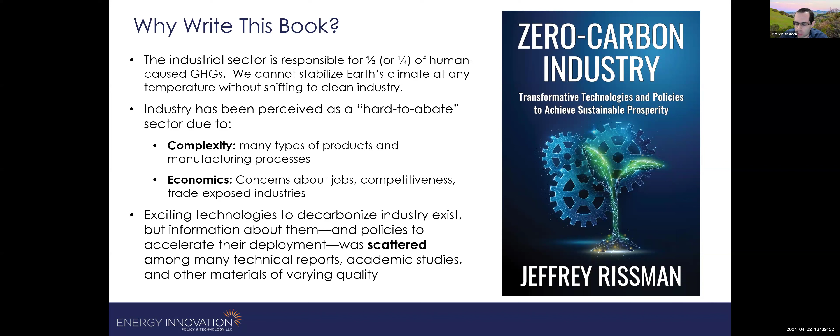And what to do about trade exposed industries. So there are so many exciting technologies now to decarbonize industry, but the information about them has been scattered across many different publications, technical research reports, academic studies, and often the technology information is divorced from the policy information. So there was really a need to bring it all together into a comprehensive blueprint or roadmap for how we get from where we are to how things will be made in the future in a clean, sustainable way.

So quickly, for an overview, when we're talking about industry, what we're talking about are the firms that make the materials and products we rely on every day, like steel and chemicals, which includes plastics and fertilizers, cement, other metals, refining, and so on. And you'll notice that globally, about 60% of the world's industrial emissions are from these top three industries: iron and steel, chemicals, and non-metallic minerals.

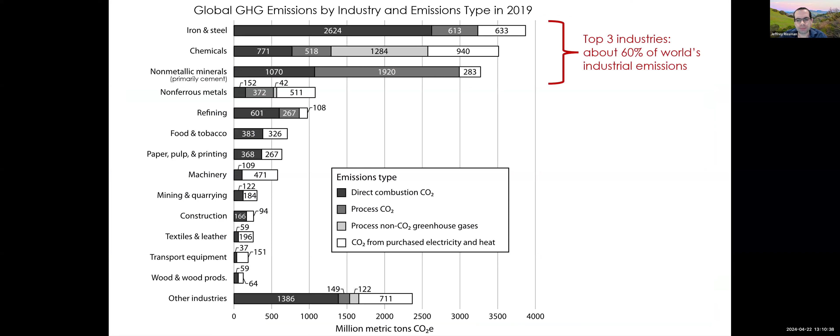As far as distribution goes, China stands out as being responsible for about 45% of global industrial emissions, partly because of their large scale of manufacturing and partly because they use a lot of coal, which is a particularly emissions-intense fuel. India and the United States, and then the European Union, if you were to group together those countries, would round out the top four.

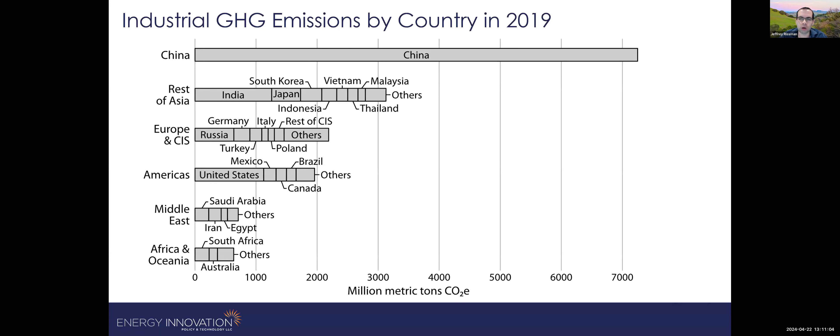So let me touch briefly on some of the exciting new technologies for primary steel production without greenhouse gas emissions or other pollutants. So today, steel making is a multi-step process. You prepare the raw materials, you make iron, and then you turn the iron into steel.

It's dominated by primary steel, which is the majority of all steel making. And most of that, 93% of primary iron, is made in a blast furnace, which is fueled by coal and a carbon-based fuel called coke. There is some steel recycling, responsible for about 22% of demand, but it can't scale up very much because we don't have enough scrap to recycle to meet today's steel demand. So it's important to develop technologies that can decarbonize primary or non-recycled steel making.

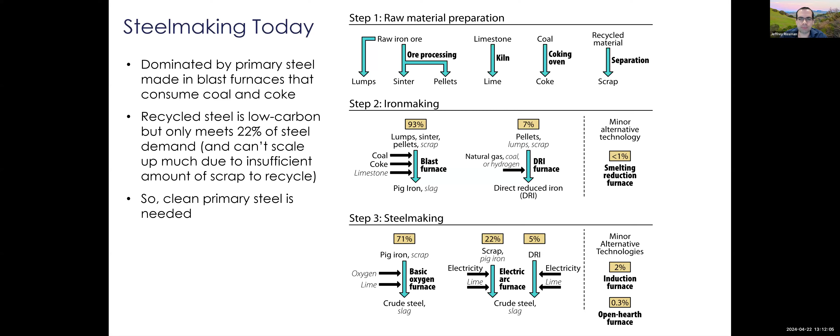One such technology approach is hydrogen direct reduced iron. So instead of using that coal and coke I mentioned in the blast furnace, you can use hydrogen as a chemical reducing agent in a DRI, or direct reduced iron furnace. About 2/3 of the energy this requires is making clean hydrogen in an electrolyzer, which splits water into hydrogen and oxygen. The remaining 1/3 is used mostly in an electric arc furnace that converts that direct reduced iron into steel. It does require high quality ore, but it's possible to upgrade lower quality ore through magnetic or gravitational separation.

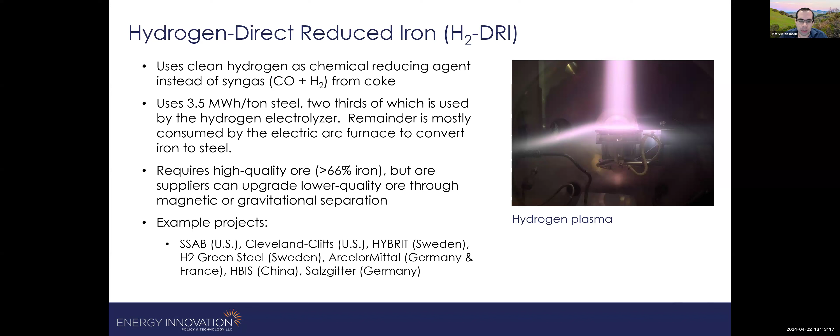So that isn't a hard and fast limit on the direct reduced iron process. And there are some exciting example projects now. In fact, two were part of the recently announced projects with the Office of Clean Energy Demonstrations in the United States, one with SSAB and one with Cleveland Cliffs, as well as a variety of projects elsewhere, like Hybrit and H2 Green Steel in Sweden, ArcelorMittal in Germany and France, and so on.

The other technology I'll touch on here is electrolysis. So the idea is, instead of using a chemical reducing agent like hydrogen or coal and coke to separate iron from iron ore, you instead use electricity to do that.

You can either do this in an aqueous solution where you insert electrodes, run a current between them, and metallic iron particles deposit on the cathode, which you can then collect and melt in an electric arc furnace. Or you can do this at high temperature in an electrochemical cell, where you still run a current through it, but at high temperatures. The impurities form a layer called slag on the top, and molten iron forms on the bottom of the chamber where it can be tapped.

Both of these approaches have some startups: Electra for aqueous electrolysis and Boston Metal for molten oxide, as well as research projects primarily in Europe with Siderwin and Europe's ULCOS, ultra-low CO2 steel making.

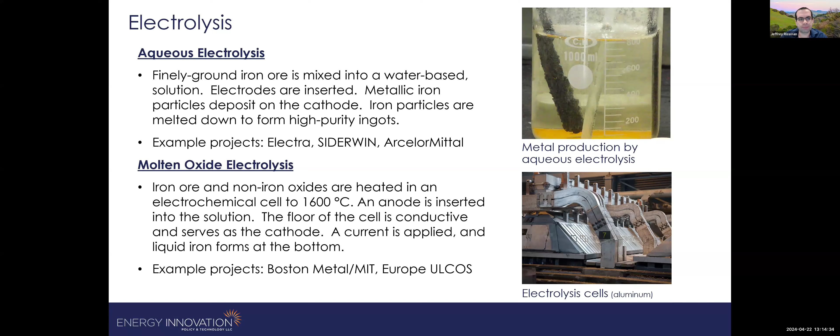Have to keep moving along because we only have a few minutes left, and I will touch on some of the electrification of industrial processes.

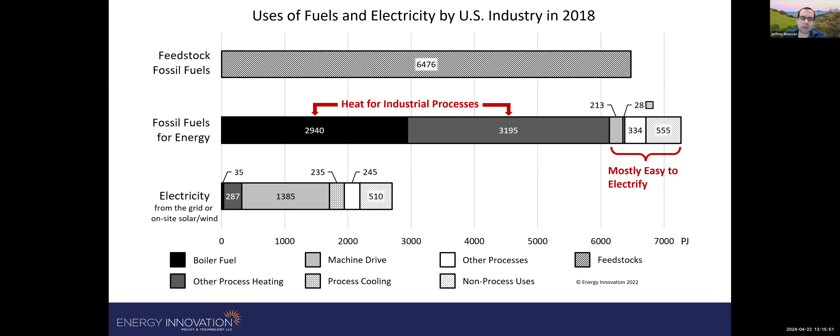The small bit on the right are other things like machine drive, which is moving things, let's say with a diesel engine, and is usually easy to electrify with an electric motor. So when we're talking about decarbonizing industrial fossil fuel combustion, we're mostly talking about decarbonizing industrial heating.

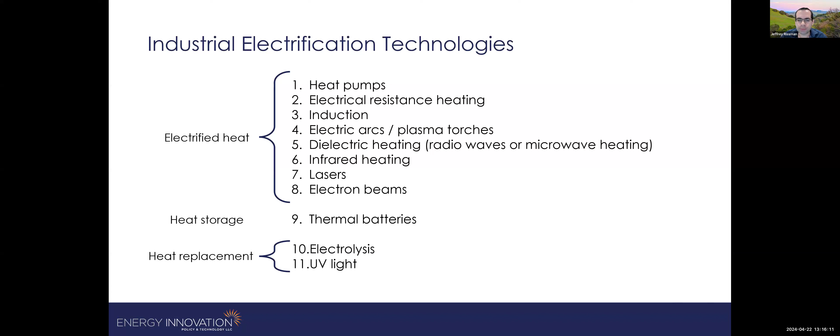And there are a variety of technologies that can provide heat for industry directly from electricity. I won't read them all off, but I've listed them here. I'm going to touch on a couple exciting ones, just to go a little in-depth on heat pumps and thermal batteries. So what are heat pumps?

They're a way of moving heat from one place to another. They use a refrigerant fluid in a closed cycle, similar to your refrigerator or air conditioner at home, to move heat from a heat source area to a heat sink area. They can be very efficient, up to 200 to 500%, meaning the amount of useful heat they deliver to the heat sink is that many times the amount of electricity they consume. They can do that because they're not converting the electricity to heat - they're just moving heat from one place to another.

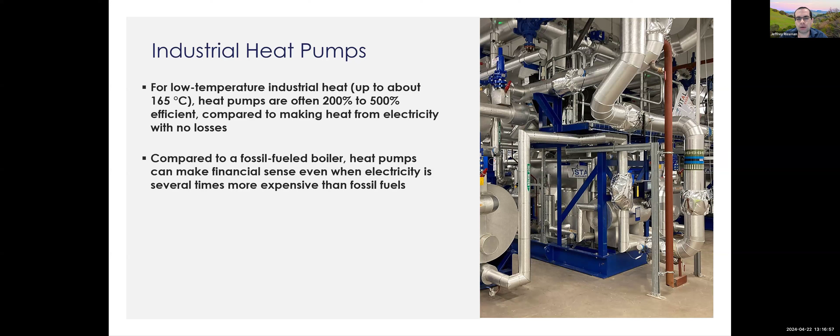So one common application would be to boil water, which is enough for a lot of industrial processes like cooking foods and so on. If your heat source is 30 or so Celsius, then your temperature increase would be 70. That's more than 2.5 coefficient of performance, more than 250% efficient compared to a perfectly efficient electric resistance heater. So you can see that heat pumps are the best, most efficient at relatively smaller temperature increases, but they're still quite efficient up to higher levels shown here.

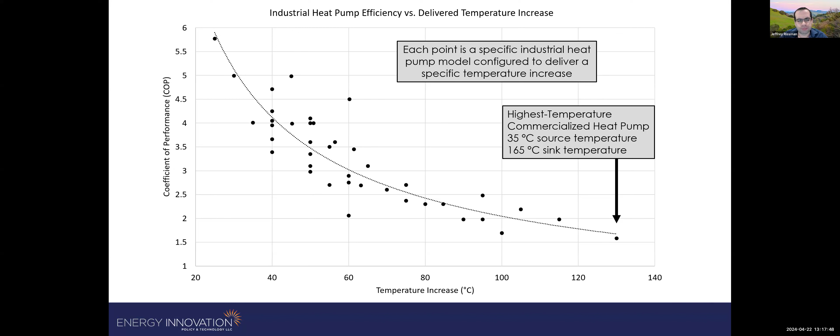The other technology I want to highlight in my limited time is the thermal battery technology. This is a way of storing heat to use later. Essentially, it's a thermal storage medium like graphite blocks or silicon dioxide sand that gets heated by an electrical resistance heater, coils of wire essentially, which take in electricity from the grid or from off-grid projects.

And then when the industrial firm needs the heat, they can either circulate a gas like air through the battery, and it takes the heat out and is used in the facility, or they could open a hole in the case to let out visible and infrared light. And the interesting thing about this is that it lowers the cost of industrial heating.

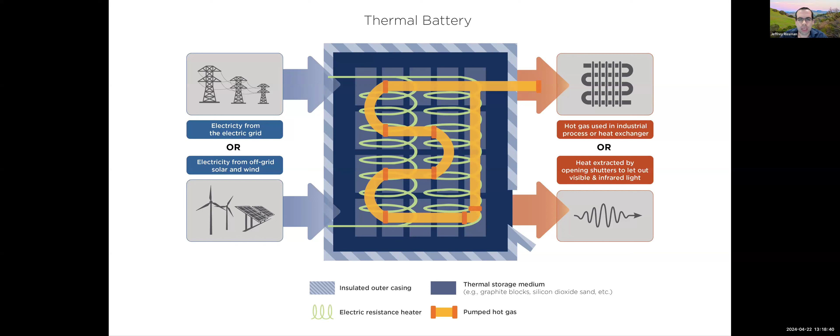And it's enough to make it competitive within the range of natural gas, keeping in mind that natural gas prices are volatile and they move around year to year and place to place. So it's good to think about rough ranges rather than exact numbers.

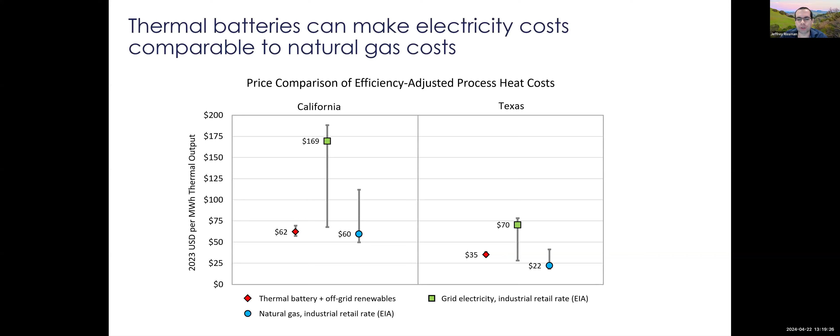Great, Jeff. Thank you so much. And thanks, Silvio, for pulling up the slides. I think Jeff just set the stage really well for the challenge, why this is such a critical area, and some of the key sub-industries we need to focus on given the size and the overall impact, as well as some solutions from a technical perspective, and very much see a similar view of the world from Jeff's perspective there.

I'm just going to share a little bit more about what we're doing at the Department of Energy to try and solve some of these challenges and address the technology gaps and move some of these technologies further into the realm of commercialization and address some of the barriers along the way. So if you go to the next slide, please.

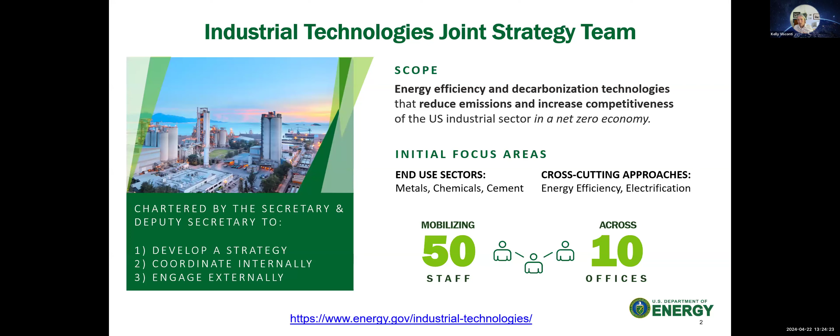So again, this picture is just showing a little bit more of that commercialization timeline pathway, from an idea in that bottom left corner all the way through to something that is a commercially available and adopted technology, and the different offices within the Department of Energy that are really helping drive down different kinds of risks—reducing technical risk, reducing project level risk, and really understanding and helping drive down market risk.

You can see the office that I sit in, the dark blue on the bottom right, Manufacturing Energy Supply Chains. We're really looking at how we help companies overcome market barriers, the cost, the economics, making sure there's demand for these products, to help move the needle and really get these solutions into the factories and into the plants. If you go to the next slide, please.

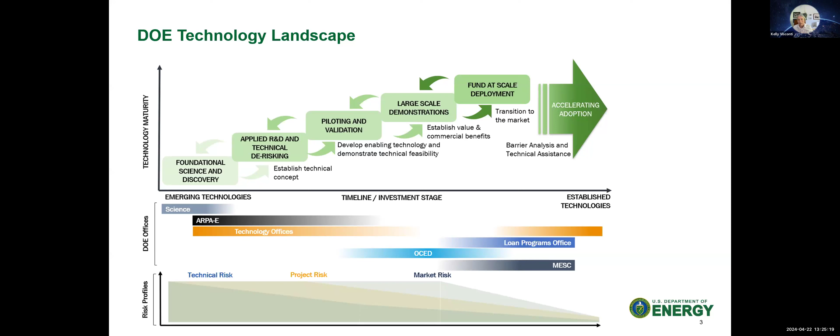And this is just a little bit more of that mapping and landscape. This speaks a little bit to what Jeff was talking about, around the different types of solutions in how you can decarbonize these industrial processes and manufacturing overall. So if you look, there's 5 columns, but if you look at the 4 columns on the right...

This is about switching your source of fuel, your source of feedstock, and energy. So this is that electrification transition that Jeff was talking about, as well as using alternative fuels and alternative feedstocks as one solution set. Energy efficiency is basically doing as much as we can with the electrons and the heat that we're putting into the system—absolutely essential and something we need to continue to drive. There are many opportunities still on the table for energy efficiency today.

The third bucket is more specifically around electrification, not just for providing heat, but there are electrochemical based processes that we can explore and utilize versus traditional thermal processes. So rather than using heat to make a reaction happen, there are different types of electrically based processes, like microwave technologies or radio frequency, that can make the chemicals react and do different things.

And then the last solution we talk about as a category is around carbon capture. So in those situations where the technology isn't mature enough, or we just still fundamentally, because of the process chemistry, have carbon dioxide coming out, how do we capture it and then either utilize it in some long-term material, say cement and concrete, and take advantage of that to make a valuable product out of it, or store it safely and securely underground.

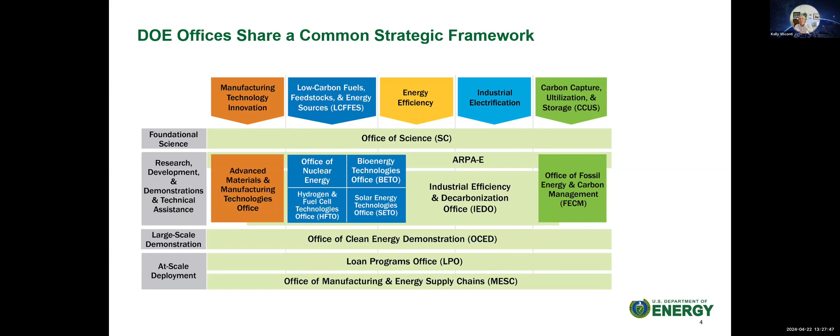Yep, that's great. We've got a lot of different documents and information out there, so just two things I want to highlight. Two years ago, the Industrial Decarbonization Roadmap was published in concert with a lot of engagement with industry, and that really helped set the stage for everything that could possibly happen, setting the framework of those four big pillars we talked about in the last slide. On the right-hand side, that puzzle piece, are the pathways to commercial liftoff.

These were published last September. There are three reports really helping show what technologies and solutions are near cost competitive, or cost competitive today, that can be used by industry in the next 5 to 10 years. And we're working on a joint strategy that's really integrating all of these pieces together.

So I look forward to reading Jeff's book, and I'm sure there'll be some great pointers and tips in there for us as we are taking a peek at how we do this together. And then these feed into things like our multi-year program plans and how we establish the objectives and goals and funding opportunities, make project selections, and then ultimately the funding that we go out with, make sure it's doing what it's supposed to do.

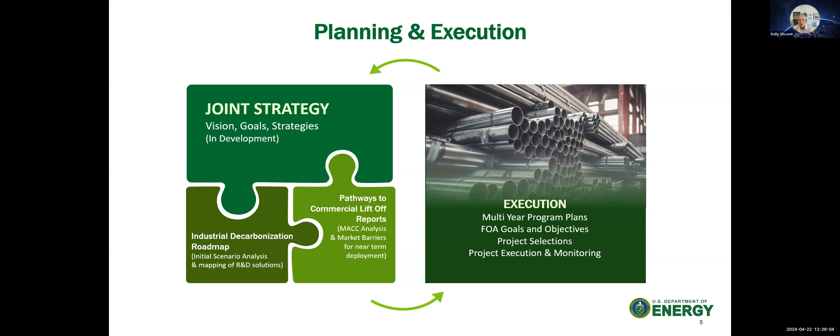So if we go to the next slide, I think I'll wrap up with a short overview of some of the programs that we have. To Sonia's point around a lot of attention on the industrial demonstrations program, there's over $20 billion that's unlocked across 33 different projects, across multiple industries and process types. Super exciting program. There are a few other opportunities still out there we want to make sure folks are aware of. Again, work in the Manufacturing Energy Supply Chain Office, and we're really focused on the 'how' of the energy transition, making sure companies are actually using the technologies and solutions that are available.

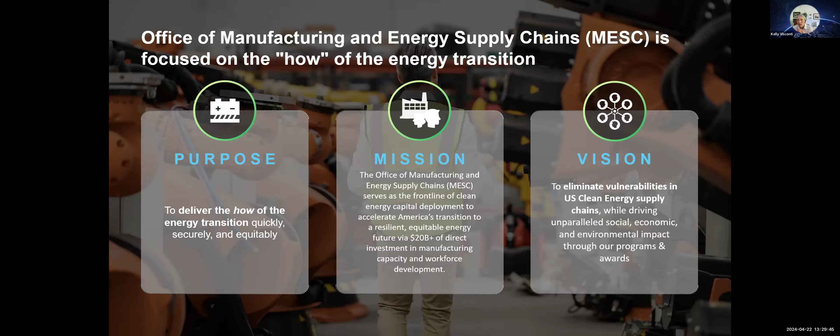Next slide, please. So here is a summary of three active programs that have funding still available. The first is focused around industrial assessments and implementation grants. These are focused on small and medium-sized manufacturers. You can get a free assessment to help understand your energy and emissions reduction opportunities. Once you've had one of these free assessments, you are then eligible to compete for $400 million worth of funding to implement them as grants. Each of those grants is up to $300,000 per project, per company, per quarter, and that has to be 50% cost share. The program's been expanded in multiple ways, and there's a big workforce development component around that too.

The second program, our Advanced Energy Manufacturing and Recycling grants, our second round, concept papers are actually due today, so if you haven't heard about it, I apologize. There may be a third, but we're hoping to expend the $425 million we've got left. This does include industrial decarbonization, so all of the things we've talked about so far in this presentation would be potentially eligible for small, medium-sized manufacturers located in coal transition communities. And then the 48C investment tax credit is open to any size company, and industrial greenhouse gas emissions reduction projects are one of the three eligible types of work under this program.

The first round closed at $4 billion, and about 30 companies self-reported that they were selected for this tax credit - you can find more information about who they are and what those projects are on our website. And then a second round - this is important - is coming soon in 2024, with $6 billion, the remaining of the $10 billion for this investment tax credit. It works a little bit differently than a grant, but fundamentally it helps with the overall economics of industrial greenhouse gas emission reduction projects. So that's a really super short overview of these three programs.